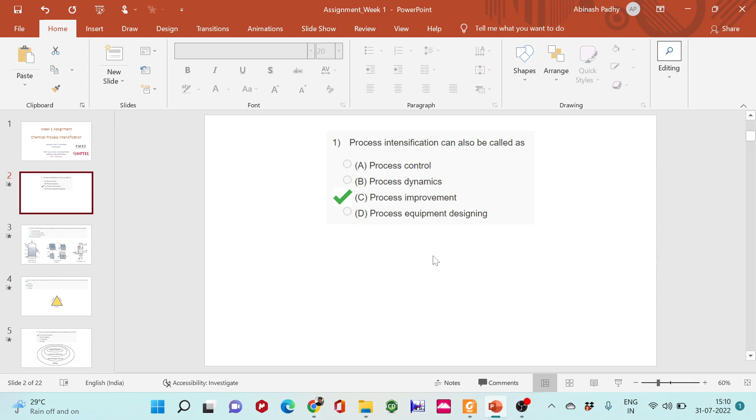So this was the first question. The second one is based on British disciplines of process intensification, which of the following was the primary area of interest? Sir has told you in the first lecture the history of how research has progressed from the British, the Americans, the French, the Holland. So could you guys try which of the following was the primary area of interest? The options are intense mixing, compact heat transfer, use of centrifugal forces, and all of the above.

All of the above sounds good, right? Shreyas has also answered, and yes, it is all of the above. Intense mixing is one. Proper mixing of the reactants is required so that the reaction time can be minimized and yields can be improved, so intense mixing inside the reactors is one important criteria. Then also compact heat exchange, for which there are compact heat exchangers like thin films and channelized pipes, and use of centrifugal force so that during intense mixing if some impurity is found, it can be discarded. So all of these are parts or disciplines of process intensification.

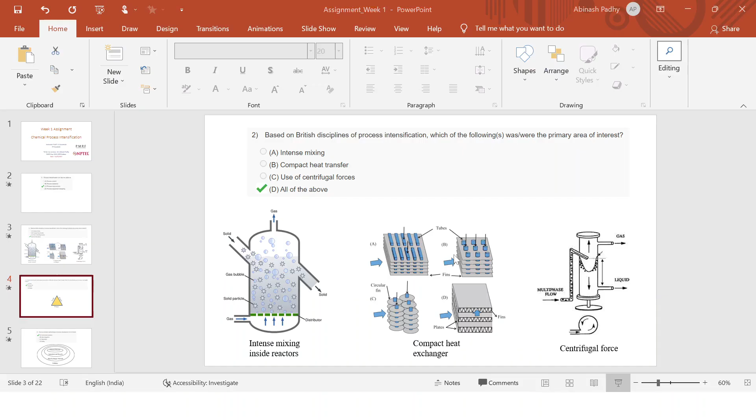The question has asked which is not drawn under the triple P. Okay, so planet? Let me see... okay, confused, right? It is actually planning. So planning is the correct answer.

So this is the triangle, right? Every process needs to have profit, otherwise how will the industry work? The industry won't sustain. Then it needs to be sustainable and greener for the planet, because it is the place where we live, and this is meant for the people - they are the ones which are benefited mostly. Planning is something which goes in the process itself, like designing and other stuff. So that's why the triple P triangle is all about profit, planet and people.

Next, this was discussed in sir's lecture, the famous onion skin methodology of development, there was a chart he was showing in the slides. So can you guys say which one is not included in that: commercial valuation, heat integration, separation and safety? Commercial valuation, right? Okay, right answer. So this is another onion skin where the reactors react, then separation and recycle happens, heat exchanger network is there, and then utility starts to happen.

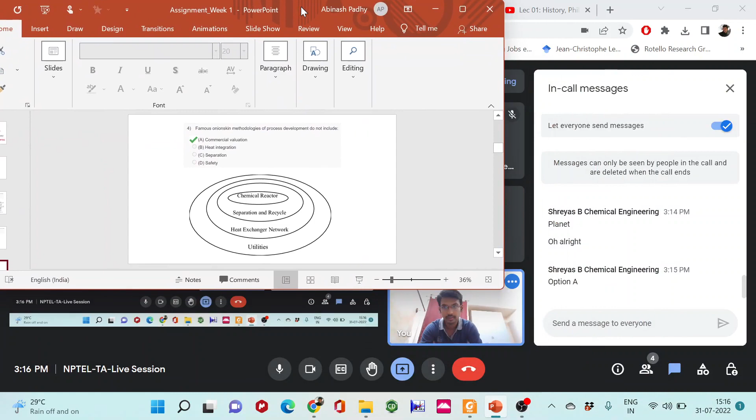Still visible, right? But when full screen it is going back. Okay, that's fine. So I can be going back and forth.

So the fifth one is: select generic principles of process intensification from the following. That is: A, optimize the driving forces and resistances at every scale. B, maximize the synergistic effect from partial process. C, minimize the synergistic effect from partial process.

Actually, there is one mistake in this question. A and B are actually correct, so C shall not be there. There is some typographical error in this. The correct answer, if we exclude C, then it will be all of the above, or actually, both A and B are correct.

Right, okay, so going next. Process intensification is a term used to describe the strategy of enhancing the scope of chemical plant needed to achieve a given production objective. Is it needed to achieve a given production objective?

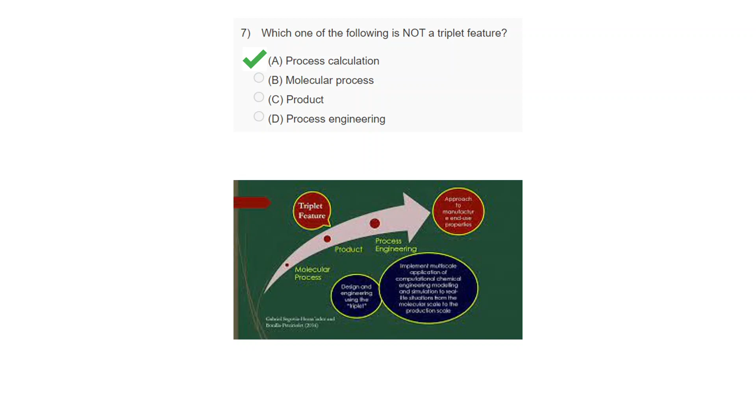So next is, which of the following are examples of principle features? That is: convective heat transfer phenomena in spinning disk reactor, formation of urea via dehydration of ammonium carbamate, separation of carboxylic acids from wastewater via reactive extraction, or D, all of them.

Yeah, it is correct. So actually, in the principle features, it's about how the reaction proceeds. How can we improvise the intensive mixing? How can we apply the ultrasonic waves or the centrifugal forces? All of these are important. Also heat transfer, like how it can be compact. So these are very few examples in which all the features have been applied. So the answer will be all of them.

Next one is, ultrasound has a critical impact on the process due to which of the following? That is: A, restrict the development of free radicals; create a lower surface area; waves generate intense mixing condition; and wave cannot propagate through a liquid medium. So which one is the critical impact that an ultrasound wave plays?

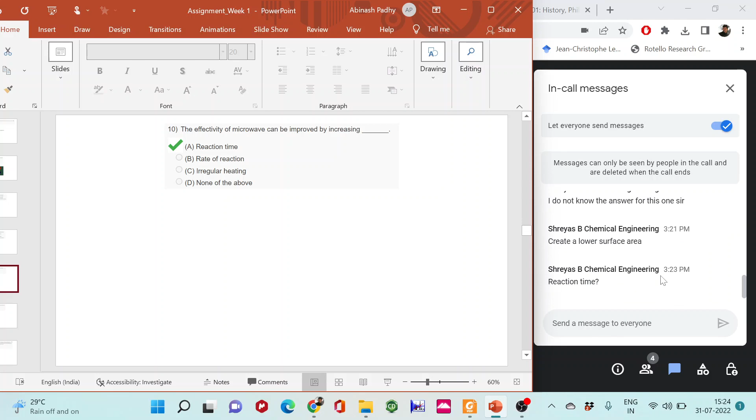Okay, it's actually correct, reaction time is the answer. Microwave is used to improve the rate of reaction. If there's no impact, there won't be any impact on the microwave if we increase the rate of reaction. So B is false, and irregular heating can't be done in the microwave. Microwaves are irradiated and some heating is created, heat energy is created. So if we give more time, the reaction time, if we enhance that, the effectivity will also increase. So reaction time, A, is the correct answer.

And which modes of heat transfer can integrate microwave phenomena? Conduction, convection, radiation, or D, all of the above. Which is the mode of transfer that can integrate microwave phenomena? Yeah, it is all of the above.

Wait a second. Okay, so actually convection is the one in which water normally gets heated up, the molecules go down and up, and conduction is mostly in metallic conductors, right, in which molecules transfer energy to each other, to the next one, and it goes on. So in microwave, actually all three of these processes happen, and in all of these modes the heat transfer can happen. So keeping this in mind, the reactor is designed.

If we see integration of function, will separation of carboxylic acid from wastewater via reactive extraction work? No, right? And will solid into product fluid in a membrane reactor? This is one phenomena, right? Solid into product fluid in a membrane reactor.

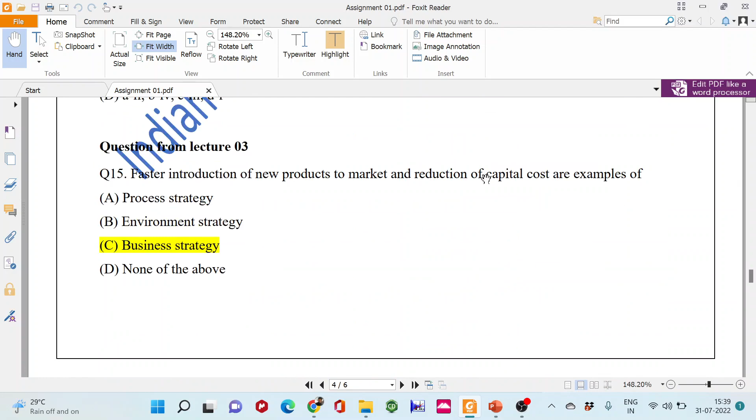So the correct answer is actually this one. Wait a second, I might have made some mistake here. Yeah, actually what I've said is correct, but what I have pointed out here is wrong.

So this will be the one that is the correct answer. That is unit operation means separation or extraction, what I talked about. Then the function, integration of function, is the conversion, contacting and mixing. Then the integration of phenomena will be the solid into product fluid, and the target enhancement will be the convective and diffusive heat and mass transfer. That was a bit difficult, right?

Fine. So question 15 is: the faster introduction of new products to market and reduction of capital cost is the example of what?

Shreyas, have you typed your answer? That's fine, Shreyas. You will learn during the course of this whole course.

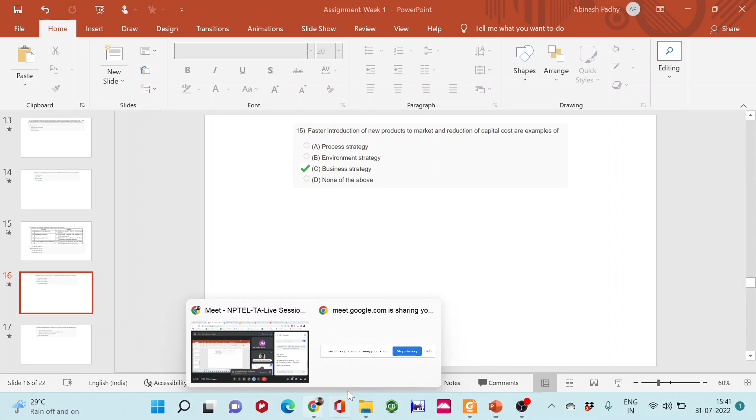Okay, and Shreyas. Okay, Shreyas has tried answering it. Let me see. Maybe a process strategy, okay.

But Om is correct. It's actually a business strategy. Business strategy is something like when we are introducing a newer product to a market, one that was not there before, and reducing its capital cost so that we can attract many customers towards it. So it is actually a business strategy that we are introducing something, and simultaneously reducing the capital cost. It is not a process strategy, or an environment strategy either.

Next question is: the extensive developments in chemical and processing aspects can be achieved by which one of the following options? A, improving remote control; B, decreasing the equipment size and production cost; C, decreasing energy consumption; or D, all of the above.

So in the chemical and processing aspect, if you want to achieve extensive development, we need to improve remote control. If you can control the plant or the whole system using remotes, sitting in one control room, we can get control over the whole hardware while decreasing equipment size and production cost. If the equipment size is bigger, the plant size also increases, and we need more control to manage a bigger equipment size than a smaller one. If the equipment size is smaller, we get more control, and we need to decrease production cost and simultaneously the energy consumption of the whole process. If we can decrease these, we can move towards development. So the correct answer is all of the above.

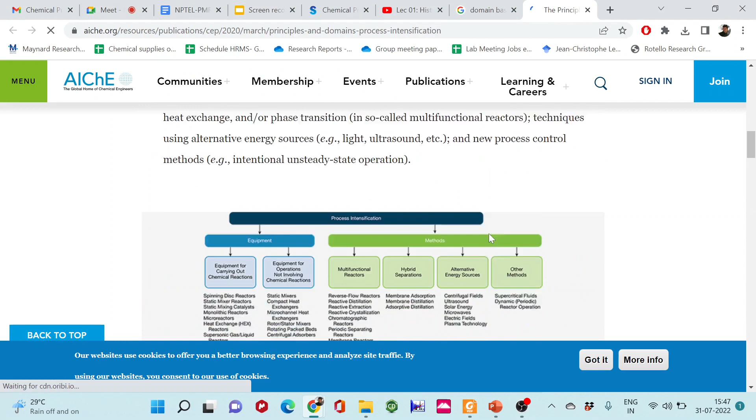Actually, there's something I can show you that will make this clearer. Let me show you... this is fully visible, not this one. Let me show it on the bigger screen.

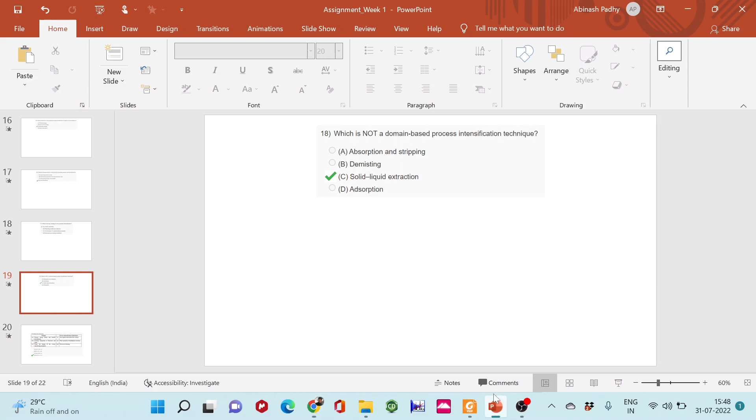Actually, in process intensification, all these things are included—methods, equipments. So what are the equipments for carrying out chemical reactions? These have been listed, along with equipments for operations not involving chemical reactions, the multifunctional reactors, the hybrid separations. So in all these wide varieties, the domain-based one is one technique used for process intensification. Let me show you one image of a demister, that might help.

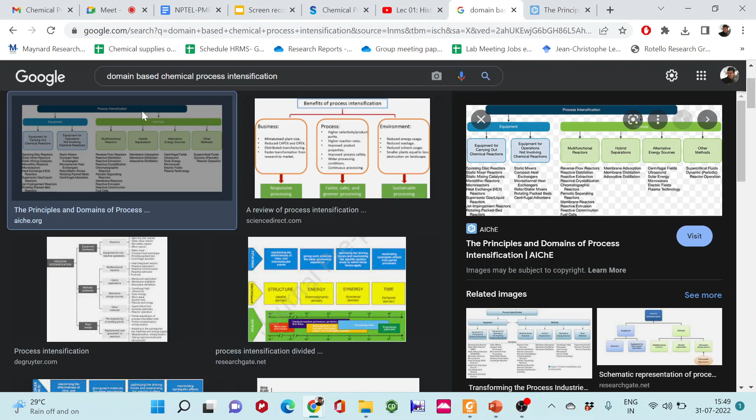That might help. How shall I... let me see.

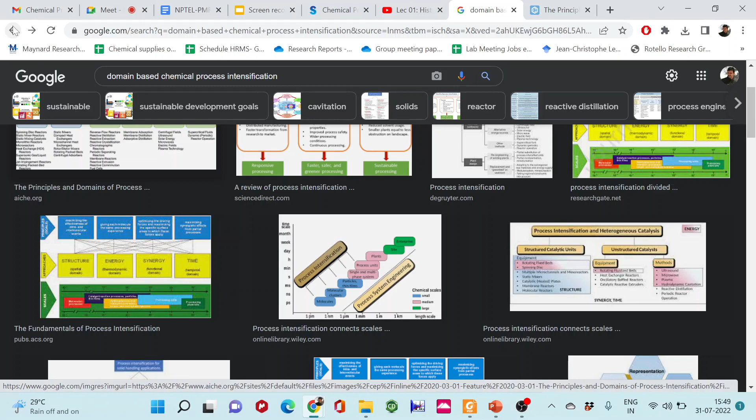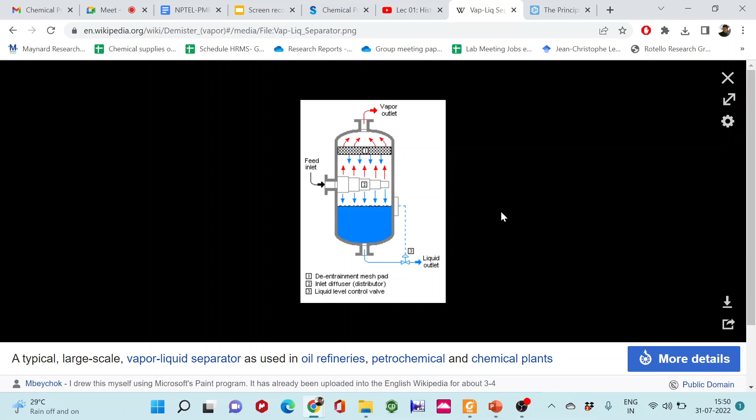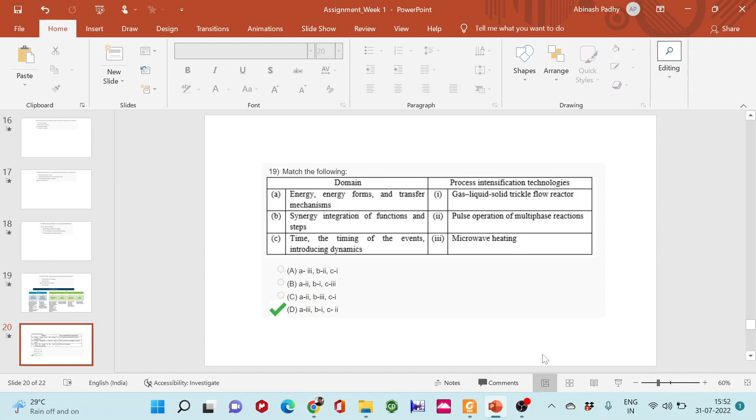If we see microwave heating as a process, what are we getting there? It is some form of energy which we are getting in the form of microwave. As we start with electricity, we get energy in the form of microwave, so there is some energy forming and getting transferred into another form, and the whole process happens. So if we consider option A, energy forms and transfer mechanisms, then it will be microwave heating.

Now, synergy integration of functions and steps, and the next one left is timing of events and introducing dynamics. When dynamics is considered, you can think of multiphase reactors. So C is linked to pulse operation of multiphase reactions, in which there is a particular time through which the reactants or components pass through the reactor. The timing of events is fixed, and introducing dynamics means it is always flowing. The components are injected with the help of a pump through one end, pass through the reactor within a particular time, and then get out through the ejected valve.

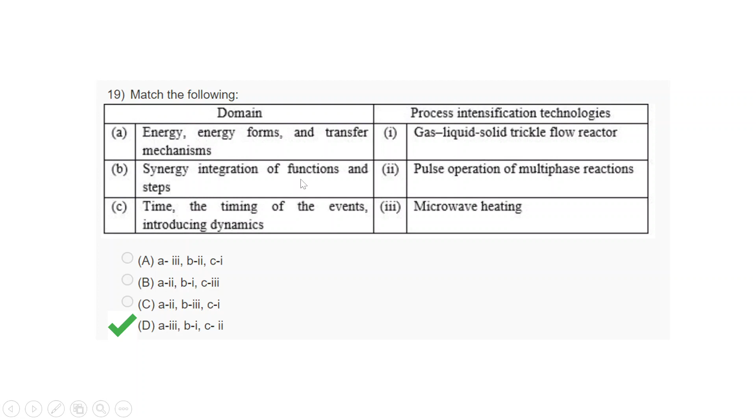In any course, have you studied about hybrid wastewater treatment or sewage treatment? There are actually sewage treatment plants. Most industries produce huge amounts of wastewater. Hybrid wastewater is water in which all sorts of impurities are mixed - some dissolved impurities, some solids which won't be dissolved, and some toxic gases too. So all these forms are mixed, and it goes to the sewage plants where there are various steps, moving step by step, and in each step one particular effluent or impurity is extracted.

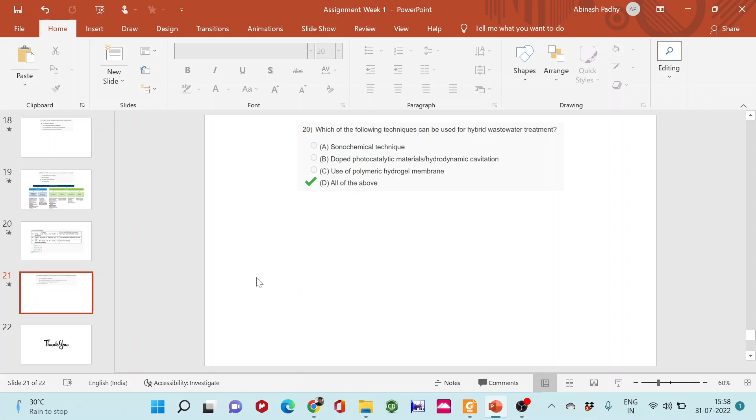You got some clarity? Okay, so these were all the model questions you can expect. This kind of question might be asked in the assignment of this course - this was a previously run course and its assignment. The questions will be mostly similar, some words here and there.